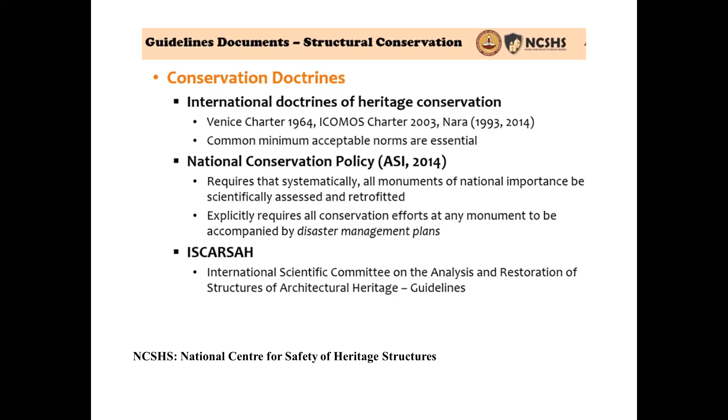Coming back to this, the draft guidelines, as I mentioned, as recently as 2020-21, this ISCARSAH guideline is catered to provide criteria and assistance for the study and intervention of heritage structures. If there are stakeholders who need assistance on how to go about conservation, restoration, retrofitting, or rehabilitation, one can always approach and use these draft guidelines. It is going to help you in going about your work.

Of course, the guidelines are based on the premise that a combination of both scientific and cultural insight has to be there, in addition to the necessary knowledge of all experts involved. That's very important. It goes without saying.

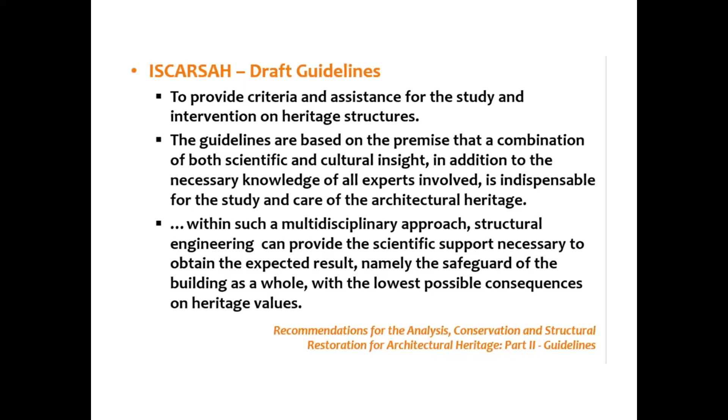Any work involving conservation, restoration, or rehabilitation of heritage buildings is actually multidisciplinary in approach. It involves not only civil engineering and architecture, but also historians, social engineering, and a lot of interaction with stakeholders. So it also involves a lot of historians and so on. It's a very interesting multidisciplinary topic, so to say.

And that is recognized by ISCARSAH and the draft guidelines also. In fact, it encourages one to go about the solution for these problems in a multidisciplinary approach. It is not siloed as the other branches of engineering or the conventional branch of engineering.

ISCARSAH, the draft guideline, also talks about how you are going to define the character of a heritage building. There are certain things which are tangible or quantified, and there are certain things which are not quantifiable. It also gives certain guidelines for that.

For instance, if you look at an old building, you may think that it does not have any character, as a common man or layman. But if you go into these draft guidelines, it tells you what elements you need to look out for. What is the character? How do you identify it? Is it associated with social values or cultural values around it, at the local level, the national level, or sometimes even the international level? It gives certain guidelines.

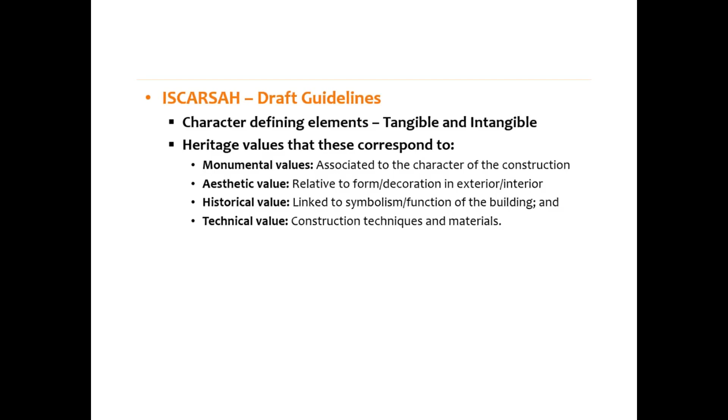In doing so, it talks about the monumental value, aesthetic value, historical value, and lastly the technical value. Technical value is something which civil engineers will be able to easily comprehend and go about. Aesthetic value is where architects and conservation architects are going to be helpful.

Going further, a couple more slides. It talks about the fact that there are some heritage buildings which go beyond the existing codal provisions, because the codal provisions have evolved over the last few decades, or probably just about a century or so. Many heritage buildings, on the other hand, predate all these codal provisions. It talks about the limitations of applying present-day codal provisions to such buildings, and also about how to go about the solution through a conventional approach, based on sound scientific principles.

It also gives guidelines for structural performance and verification and validation. And it strongly emphasizes the fact that whenever we go about restoration or conservation or repair and things like that, the approach has to be based on what is called a minimal intervention program. As far as possible, try to do as little as possible and try to get maximum benefits out of it. That exactly is the challenge in conservation of heritage buildings.

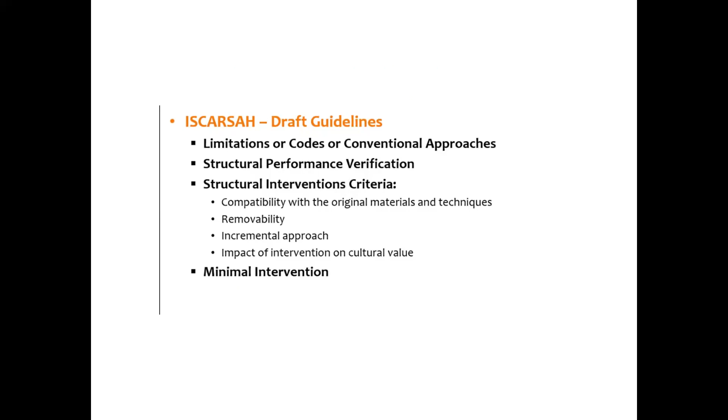Now I'm going to talk about a few definitions which are very important actually. Honestly, I also used to get confused with certain definitions. What exactly is repair? What exactly is retrofitting, strengthening, and so on and so forth. But I have made some bullet points for you to understand this very easily. And then when I talk about the case study, you will be able to relate to these definitions very easily.

When you talk about repair, it refers to post-damage structural and/or architectural intrusion. For example, if there is damage to a heritage building, I may drop the word heritage and just use the word building itself. If there is damage to a building, repair means it is after the damage has occurred. So obviously it's very easy to understand. Repair means that it is going to bring back the damaged portion of the building into functionality, just like it had before its damaged state.

It does not improve or increase the strength or the performance beyond its pre-damaged state. So it's as simple as that. If there is something which is not working, you just get it repaired and start getting it working, just to the pre-damaged state. Usually repair and restoration are cosmetic in nature. That's what generally people have an understanding about. So they are considered cosmetic in nature, just to bring it to the pre-damaged state.

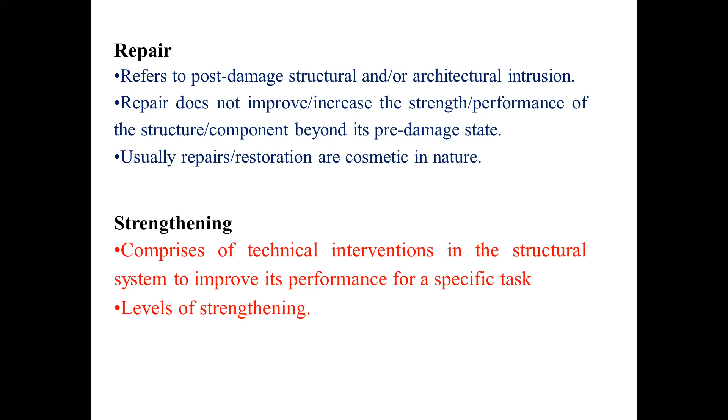Again, I reiterate that whenever you do any of these things, it should be based on the minimal intervention criteria. Just because you want to strengthen an old building does not mean that you can add huge girders and change the character of the building. That's the bottom line. I'm not going to repeat that once again.

Now, this term retrofitting is something which is very commonly used. Strengthening before an anticipated distress is called retrofitting, not after the distress has already occurred. It's very important. Say, for example, there is an unfortunate event of an earthquake and a building has been damaged but has not fallen. You can either repair it or retrofit it. If you repair it, you bring it back to its original condition, which means that in a future earthquake it might get damaged again. On the other hand, if you retrofit it, in a future earthquake it can withstand that event.

Okay, that is called retrofitting. In anticipation of a future event, you are going to do this. So that's called retrofitting. Of course, there are two schools of thought. Some people say that's not the definition of retrofitting and it is rehabilitation and things like that. But I have taken it from the guidelines which I mentioned earlier.

Strengthening after damage has occurred, which can also incorporate additional loads, is called rehabilitation. I'm going to leave it to the participants to delve into these two terminologies. You can make your own understanding of this. I have used certain guidelines, so that's the reason why I gave these two terminologies separately.

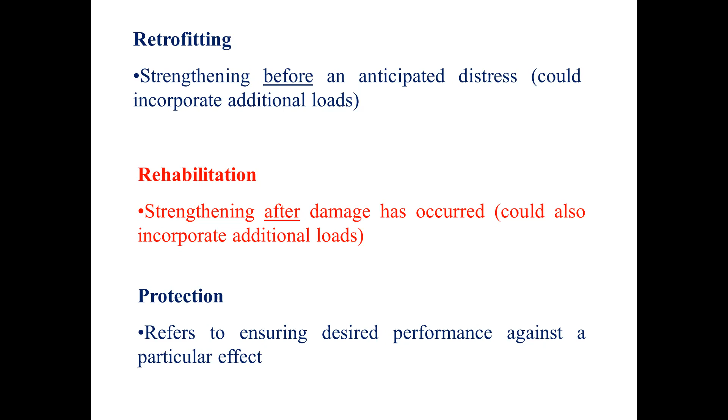So it refers to ensuring a desired performance against a particular effect. It could be a short-term effect or a long-term effect. Again, the bottom line is about minimal intervention. Protection you can always do on a temporary basis. You can protect the building up to a certain time or event, and then go back to the original condition.

The next term which one has to be aware of is called modification. Of course, civil engineers and architects do prefer modification extensively in many situations. It refers to partial or slight change in the structural or the architectural form, especially if you want to change the usage pattern. Let us assume that there is an old heritage library building, and you want to modify it to modern day requirements. It is allowed as per the guidelines.

It could be partial or it could be a slight change. For example, you may want to remove a non-load-bearing system which is not adding to the character of the building. You can do that. So that is called modification. Of course, when you talk about modification, you talk about change in the structural form. This could improve or reduce certain performance requirements. We have to be very careful about that.

In a load-bearing system, it is okay to remove non-load-bearing elements. But if you want to modify the load-bearing element, it may change its performance. So we have to be very careful about that. In fact, in the case study which I'm going to discuss very soon, I'm going to talk about how certain modification was actually necessary and it added to the character of the building.

The next term which we need to be aware of is called rectification. Straight away, it's very easy. If there is a mistake, you need to rectify it. As simple as that. It refers to setting right a mistake that has happened knowingly or unknowingly.

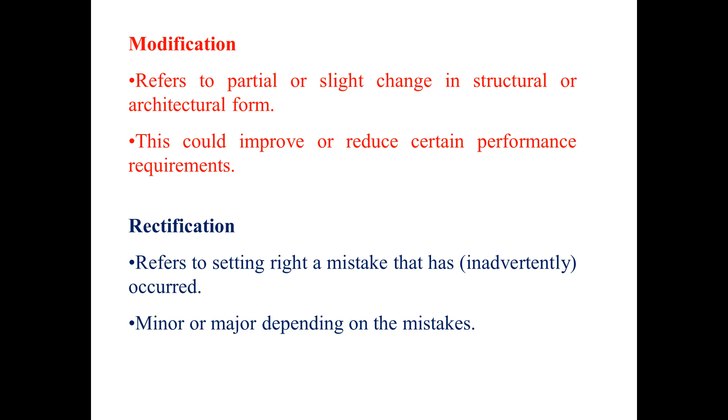Maintenance is something very easy to comprehend straight away. It is the work needed to preserve the intended load carrying capacity. Please note the underlined words: to preserve the intended load carrying capacity. From the point of view of structural engineering, maintenance is required to preserve the intended load carrying capacity.

For instance, if there are steel girders in the heritage building, you need to maintain them regularly to prevent them from getting corroded or deteriorated. You don't want the steel girders to lose their capacity. If there are timber rafters, you need to maintain them. You don't want them to deteriorate and be affected by worms and other things. You have to be very careful about that.

That's very important. In fact, one has to come out with a maintenance protocol once the entire process is done. Even new buildings need maintenance. Modern day buildings also need maintenance, so there is nothing wrong about it. Any engineering system does need maintenance, and so is the case with heritage buildings as well.

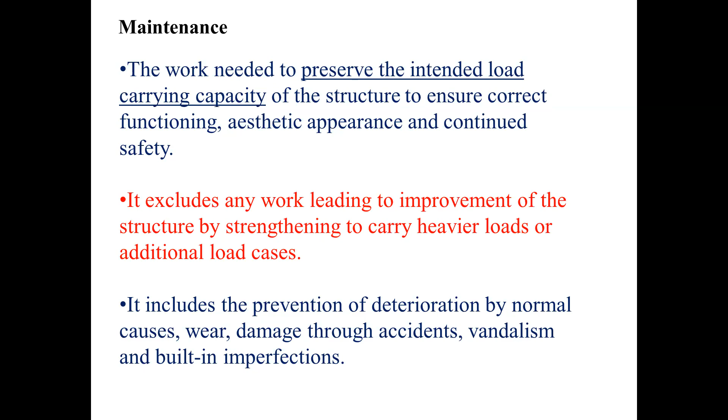Of course, it excludes any work leading to improvement of the structure by strengthening, or to carry heavier loads or additional load cases. It includes the prevention of deterioration by normal causes, or wear and tear and so on. You can't have a protocol for maintenance when vandalism is going to come in, things like that. So one has to live with it.

Maintenance, of course, deserves extreme attention. I have given an example. In railways, there are what are called permanent way inspectors. They are the ones who maintain the tracks, a crucial lifeline of railways. Their only job is to ensure that the railway tracks are in functionality without compromising on safety. Very important. It needs to be performed in a systematic manner.

As I mentioned earlier, we need to come out with a protocol of maintenance. You need to have a checklist and do it in a very systematic manner. You cannot bypass any of the parameters given in the protocol. All structures should be designed and constructed with consideration of both capital expenditure and predictable maintenance cost.

One of the common mistakes many of us make is to think that once you comprehensively repair and rehabilitate a building, you don't need to worry about it for the next 50 or 100 years. It's not like that. It has both capital expenditure and a maintenance cost, so it has to be considered when you're talking about financial implications.

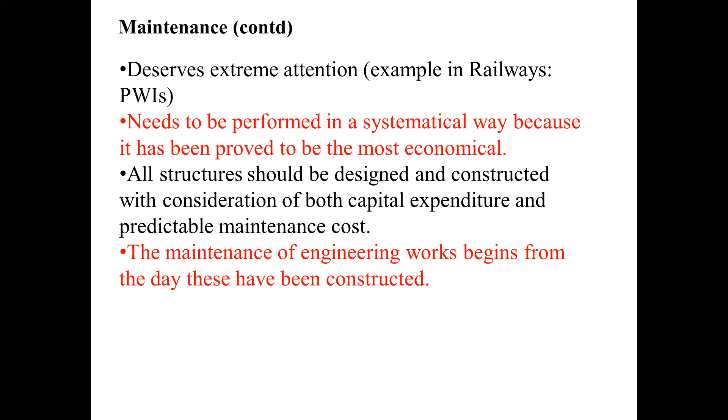Lastly, the maintenance of engineering works begins from the day they have been constructed, right from the day. It's not that you can start maintenance after two or three decades. It starts from day zero. Two more terminologies before I close the first part of my lecture: conservation and restoration.

It describes the process through which the material, historical and design integrity of any built heritage are prolonged through carefully planned intervention. It's very easy to understand. When you conserve something, you are going to extend its life without compromising on its performance. You are going to extend its life carefully.

For instance, I can give a very amusing example. Modern day cricketers, if they want to prolong their career, may drop out of one of the formats. Probably they may drop out of test matches and prolong their career in T20s and ODIs. To prolong their career further, they may drop out of two formats and continue in only one. That is called conservation.

You conserve the performance through a carefully planned intervention technique, in engineering I'm talking. It includes examination, documentation, treatment, and preventive care. By the way, all these terminologies, very interestingly, are used in the medical field also. Whatever happens to a building is valid for a human being too. You retrofit, repair, operate, modify, conserve, and prolong the lifespan of a human being. There are a lot of remarkable coincidences between the medical field and civil engineering.

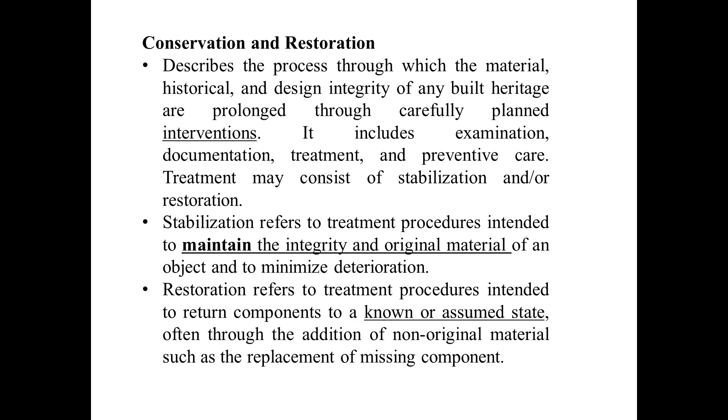A repeat of this: rehabilitation operations aim at restoring the structure to its original service level. In some cases, this consists of giving the structure the service level which was intended but could not be attained because of inherent deficiencies in the original design.

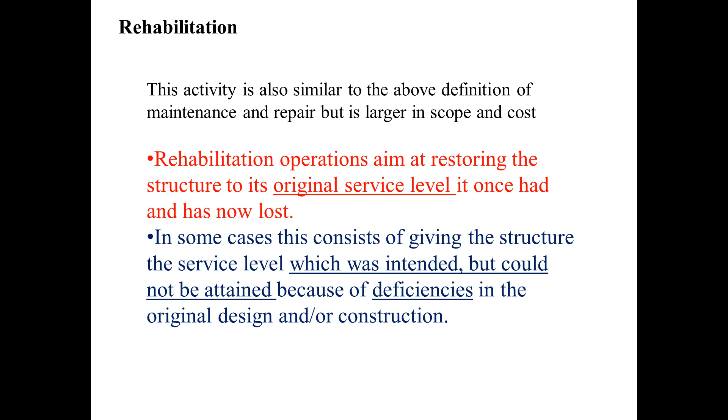When to rehabilitate? Having done with these terminologies, let us move to a very important question which I posed in the beginning of my lecture. First of all, when do you define a building as a heritage building? There are guidelines for that. When to rehabilitate it, at what point in time, or do you want the building to continue in the existing condition? These are all some of the questions.

Very interestingly, in our Archaeological Survey of India, quite a few monuments, we do not go about rehabilitating them. We continue conserving them unless you come out with some known signs of distress. For example, many of the heritage monuments in Karnataka, you just continue in the same state. You conserve it, that's it. You don't rehabilitate it.

If the levels of deterioration show a positive sign of change, you need to rehabilitate. And if you know that aging is leading to deterioration, visible signs of deterioration or documented evidence, then you need to go for rehabilitation.

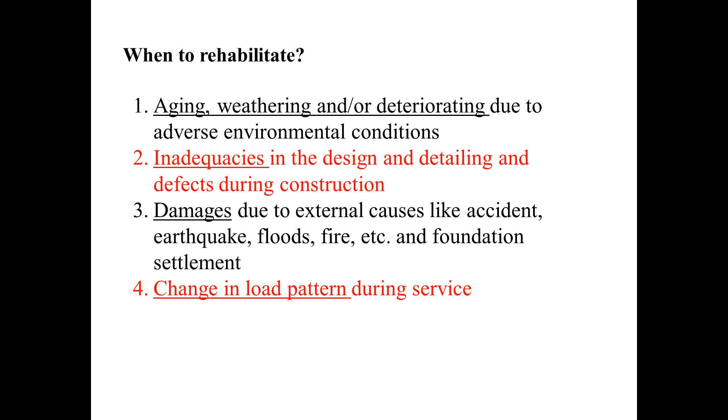It also depends on the change in the load. Many of the heritage buildings are in functional form, so it's not that they are kept empty.

Quick terminologies: replacement, as the name itself says, you can replace certain components of a building. And if a certain component of a building is broken, or it has come off, you are going to reconstruct.

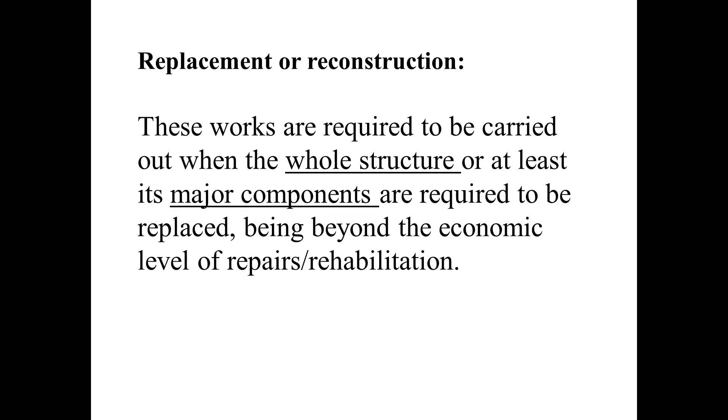Probably I'll come to the main part of my lecture. The summary of whatever I have been discussing can be related with one important thing: how are you going to relate the cause and effect? What led to the effect which you actually notice now?

If there is a building which has got a crack, what was the reason why that crack happened? If there is a building which is profusely leaking, what is the reason why it has started profusely leaking? So this is something which is the most difficult thing, in my opinion.

You need to relate the cause and effect. As a civil engineer, I think that's the most important thing. What is the cause of the damage? What is the cause of the deterioration? What is the cause of the defect? What could be the cause of some deficiency in that building or its components? What is the reason why that mistake happened? Were there any overloads or events that were overlooked, or any accidents it met with earlier? You need to relate the cause and effect in measurable and describable form.

If you are not able to do these two things, you will not be able to go about with the repair, rehabilitation, or conservation.

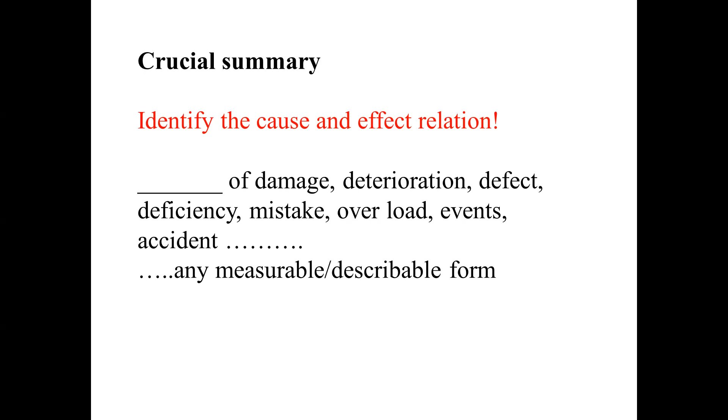Lastly, there are a lot of questions which bother most of the stakeholders, including civil engineers. In the case studies I was involved with, many of these are some of the questions which bother us.

How long have the signs of damage been noticed? You see a crack—was it a recent one, or an ancient one, or is it increasing? Is it changing? So how do you know the load path for which the building was designed, or what was the intended load path? What was the intended structural form?

Could some defects have been overlooked or unknown? Will there be any further damage when you do something?

What happened in a similar structure elsewhere is also very important. Very often we tend to get some kind of safety in knowing what others have done in a similar situation elsewhere. Very, very important—sharing of knowledge is important, and sharing of mistakes we have made is also very important. You don't want to repeat the mistakes; you want to emulate the good practices.

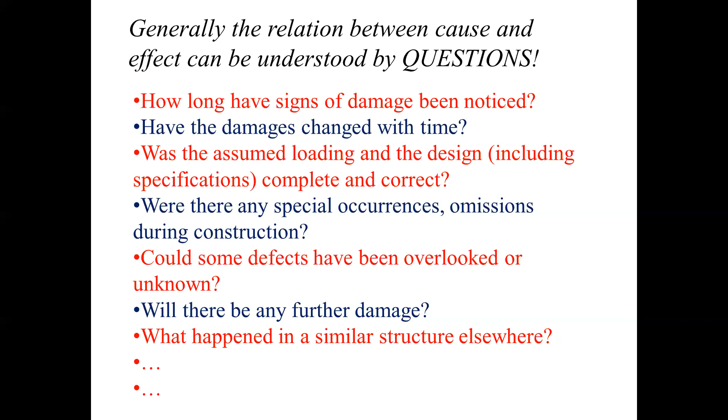So the bottom line is, how do we repair, restore, rehabilitate, or strengthen, or whatever. There are several factors involved.

I have sort of shortlisted them. It depends on the importance, and obviously it depends on the cost. It depends on how reliable your maintenance, repair, or conservation plan is, how robust it is. It should be feasible—if the cost permits, is it possible to do it? Do you have the wherewithal, the technology, and the skill set to do it?

What are the risks associated? Is the scheme of conservation or rehabilitation robust enough? Is it amenable for future modifications? For example, if you want to introduce something and it's not amenable for future modification, it may not be a good idea at all.

What is the past performance of similar schemes? What is the duration required for carrying out all these things? Of course, there are social aspects—you don't want to change the social aspects. A heritage building is quite dynamic in nature, despite the fact that it looks aged and lifeless. But actually it's quite dynamic from the point of view of social engineering.

What is the recurrence data? The damage caused by non-structural elements—all of these play a very important role.

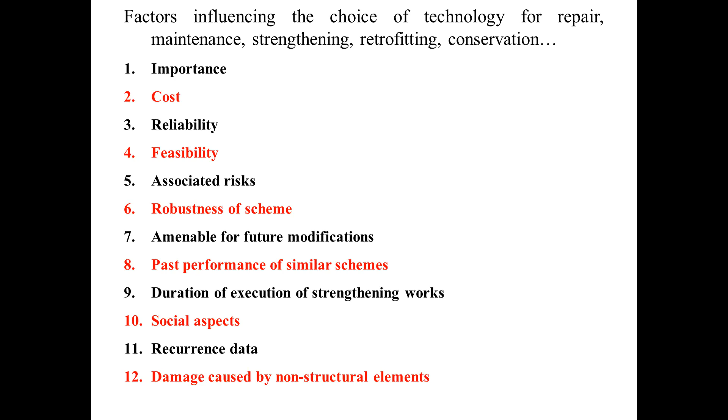I have answered all this question earlier itself. Are there any guidelines? Yes, there are, but the guidelines are generic. One has to come out with innovative, case-specific guidelines through comprehensive study of the heritage.

Decision making is often quite difficult because, after all, no two heritage buildings could be identical. In fact, no two modern buildings are identical either—that's a challenge in civil engineering. So is the case with heritage buildings also.

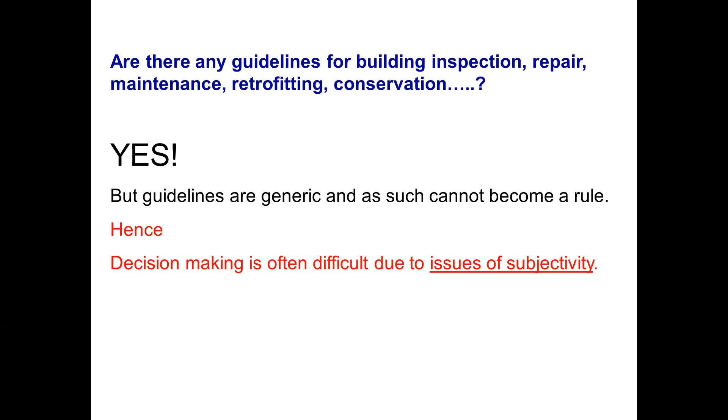I will skip this, and also skip this. I will now come to the second part of my lecture, that is the case study.

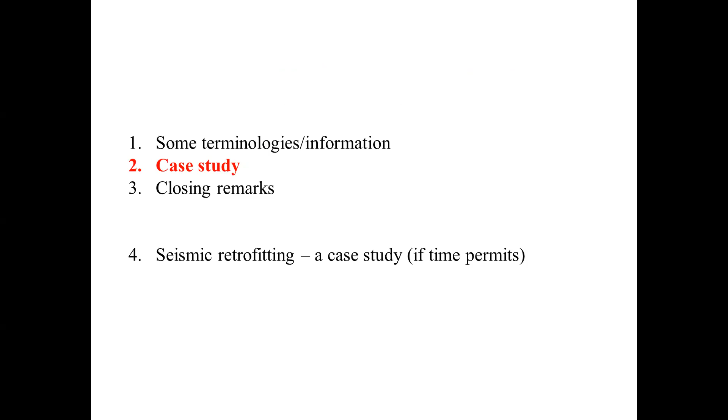I was fortunate enough to be involved in the rehabilitation and restoration of this particular building. This had heritage value for several reasons. By the way, this is a building which belongs to the University of Mysore. And you know that the University of Mysore was very proud because our former president, Dr. Sarvepalli Radhakrishnan, resided there as a professor, using it as his residence for a period of 5 years during his academic tenure.

As a consequence of which it had got heritage value. It also had heritage value because of the character of this building. These buildings, along with the university main building and surrounding buildings—the hostels, the administrative building, the library and things like that—they were all built with a certain character. It had given an appeal to the entire campus, so obviously it also became a heritage building.

So the University of Mysore was scouting for people who could participate and help bring about restoring this building to its original condition, or as near to its original condition as possible. When we first went there, this was the condition of the building.

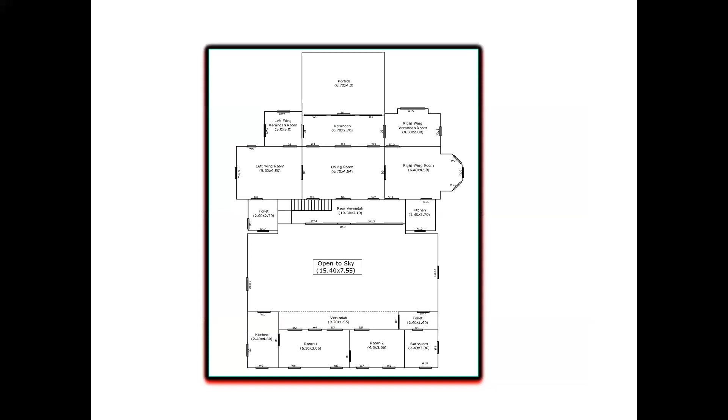Now we start with the structural assessment protocol. You just cannot say that I observed a crack here and then there's some distress here—there has to be a systematic way in which you document this. So, the structural assessment protocol: initially you need to do some exploratory studies, or you can also call it a reconnaissance study. The more visits you make to the building, the more you understand about it. It's very important to engage with the building quite often in the preliminary stages.

Just keep visiting the building and keep observing it. You will be able to understand the structural form easily. In my experience, the first time you visit a building everything might seem very complicated, but the more times you visit it, the clearer it becomes. The analogy is quite remarkable - even for a doctor to understand a patient, more visits are important. Only then can the doctor make a guess about the situation.

So exploratory studies are very important. During this time you can also get the foundation profiling done, which is not visible otherwise. You need to get the foundation profiling and soil investigation done - it's a mandatory requirement.

You need to carefully inspect it. You need to grade the components of the structure based on visual parameters. I'll tell you how to do that.

You may want to do certain technical inspection tests, like non-destructive testing, partial load testing, or comprehensive load testing. There are so many methods by which you can come out with an assessment of the structural parameters.

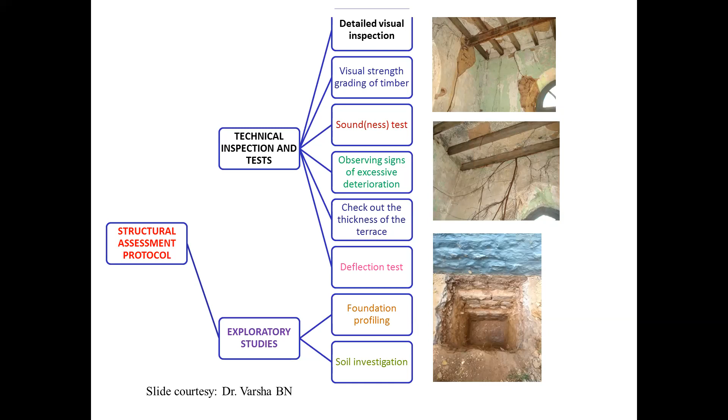Now, if it were a modern day building - say a modern concrete building - it is very easy to evaluate the in-situ parameters. For example, you have cast a concrete slab and want to know whether the concrete is good quality or not. There are several ways by which you can do it.

You can do an NDT test, or take out a sample - you can extract the core of the concrete and test it in the laboratory. Or you can do a profometer test. You can also conduct corrosion testing on the reinforcement, and so on and so forth.

But unfortunately, in heritage buildings, most of them were constructed predating the modern codal provisions - we never had all these things during those times. So there are some guidelines nevertheless, but probably we are not aware of that. We need to rely on this very crucial parameter called visual strength grading. It appears subjective, but trust me, it is not.

For instance, if you want to do a visual strength grading of timber members, these are the things you need to look out for. Is there horizontal splitting in the timber member? Are there any flexural cracks? Are there flexure-shear cracks, or shear-compression cracks? Is there any delamination of the timber elements? Is there any loss of cross-section area?

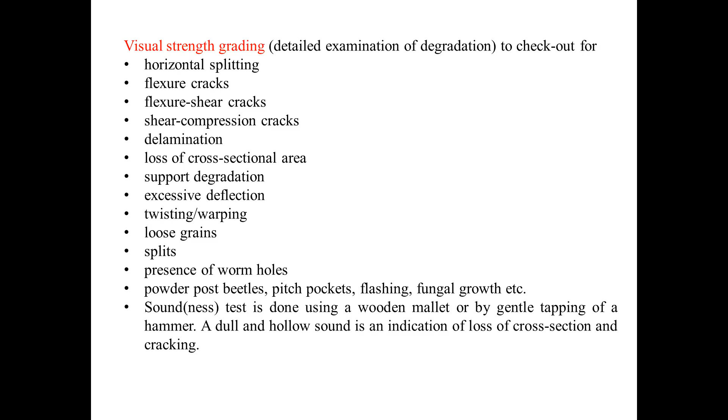The moment you do this visual strength grading, you need to document it. You need to convert that into drawings - very, very important. Is there a settlement? There are a lot of surprises which one may come across when you start doing the documentation and convert that into drawings.

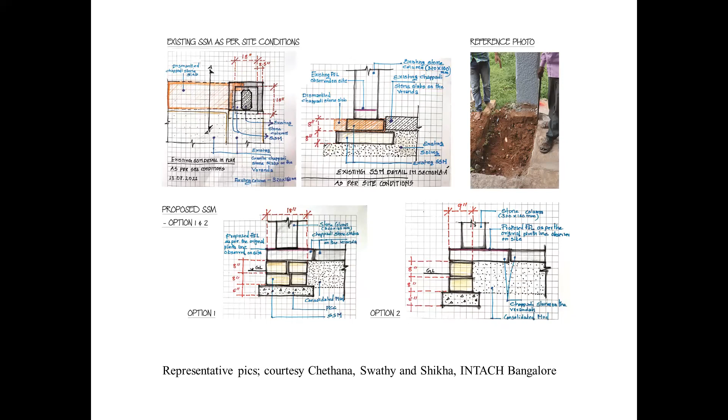Okay, you'll really understand in the engineer's language. Now let us go virtually into these components of this building.

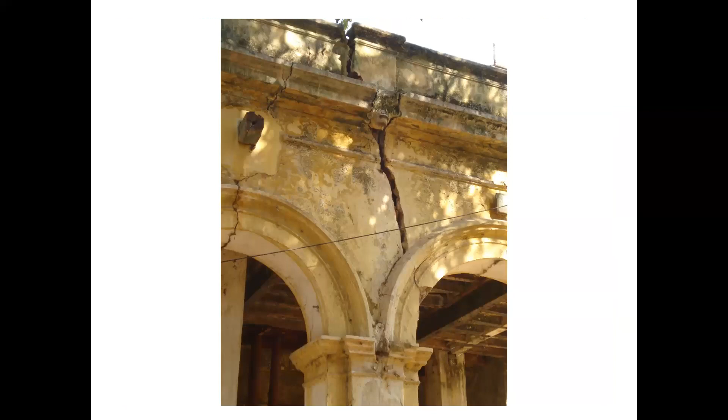There's a severe separation of the component, the roof of the portico, and it was supported on the front edge of the building by arches, three arches. There's severe cracking, shear cracking in the arches. This is something which you notice.

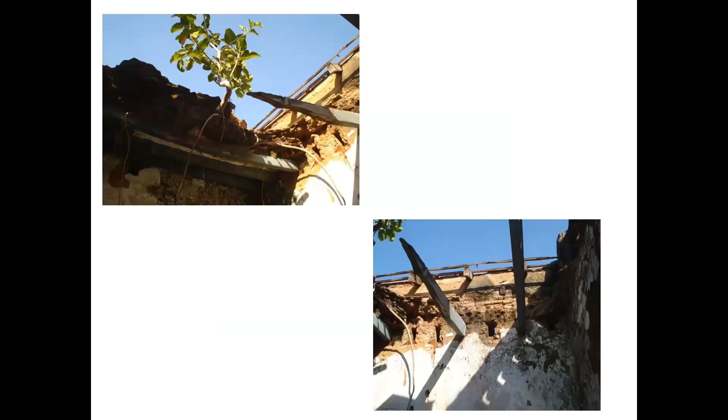And I come to the front, the portion where you saw severe damage in the front of the upper floor of the room. It had got badly distressed because the roof had come down. So the Madras terrace roof is a timber-supported roof.

There are timber rafters placed at close intervals, approximately 600 mm center to center, 600 to 700 center to center, on which there are thick layers of masonry constructed, and it acts like a roofing element. The timber rafters had gone, and as a consequence the Madras terrace masonry part had come down. The entire roof was exposed to sky.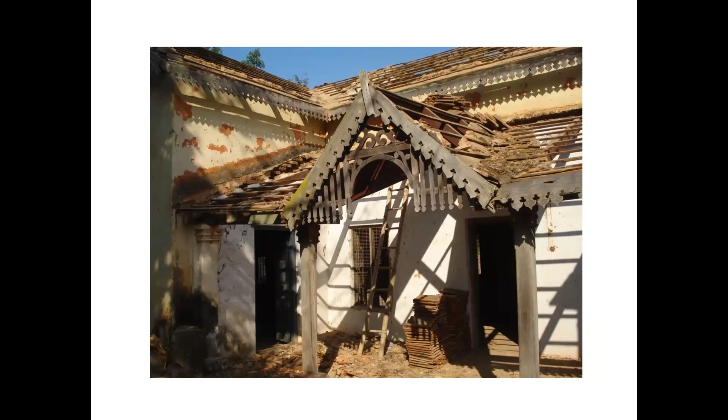And you will also notice that there is a growth of this vegetation. It had added to the distress. Very ideal for the trees to grow. It has got a good amount of nutrients for itself to grow. And this is the amount of distress you see in the upper portion of the portico. So in front of this, the portico also had partially damaged.

There's one huge 1 meter diameter depression. In fact, carefully when we went there and just poked it with a crowbar, the entire thing came down. 1 meter diameter of the wall came down. So you have to be very careful about that as well. So this is a close-up view of the, I cannot call it a crack. It is already loss of the elements itself.

Now here is something which I would like you to ponder upon. If you recall the plan form, there's an internal staircase. And this was an external staircase constructed in RCC. Obviously, you don't need to have profound knowledge. This was added at a late stage for the servants to come and access the upper floor of the building.

So they had removed a window opening and converted that into a door opening, and they had added this staircase. Obviously, the conservation architect would be concerned about this, and even a layman would be concerned about the character of this building. We took a call to remove the staircase and bring it back to the original functional form. Now I have not gone into the inner details. I'll come to that also very quickly.

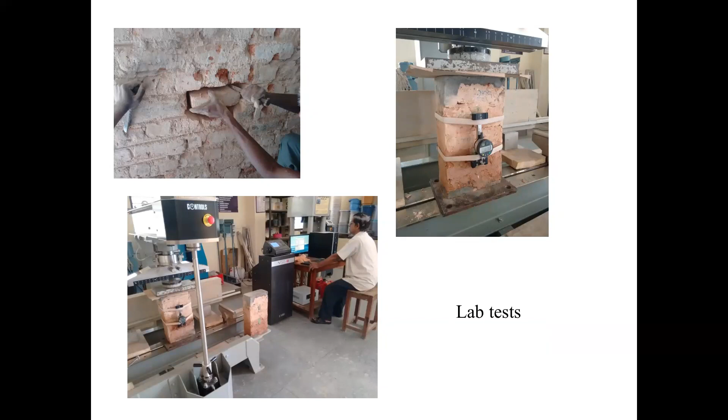You see my former colleague, late Parsati, who used to help us in all these things. Obviously, that was a heritage masonry building. We need to assess its masonry capabilities. We took out the brick samples, the mortar samples, tested the prisms in the laboratory, and we were able to assess its prism strength to the maximum extent possible.

And sometimes, but this is just a representative picture, not with respect to that particular building, for Madras terrace roofing or jack arch roofing or any roofing system, if the visual strength grading does not give you good confidence to judge the condition, you may want to resort to a load test. A load test is very simple and straightforward. It may be complicated to execute, but in principle, it's very simple.

You subject the roofing elements or any of the structural components to the prescribed load. For example, if it is a roofing element used in a residential building, you know that it had to be designed for 2 kilonewton per meter square in the present codal provisions. You load it to its factored load, 1.5 is the factored load, and go well beyond it, and get a load versus deflection curve. Knowing that load versus deflection, you will be able to assess its stiffness and its strength.

You will also be able to assess its residual strength beyond the working capacity, or the unfactored load. This is very important. You may want to go to the load test protocol in the event that you are not able to make any judgment from NDT, visual inspection and other distress parameters. This is a last resort. You don't want to do this as a first step.

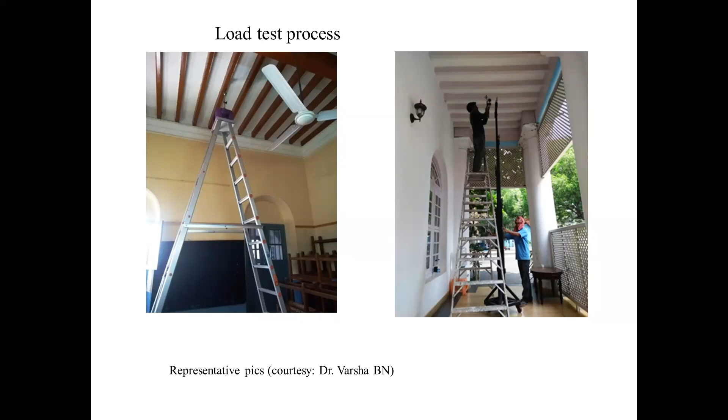Of course, there are NDT. I think I should have shown this slide earlier and later shown the load test. Just like you do NDT for any of the modern day materials and components, you also have this special rebound hammer for masonry, and different types of transmitters and receivers for pulse velocity measurements.

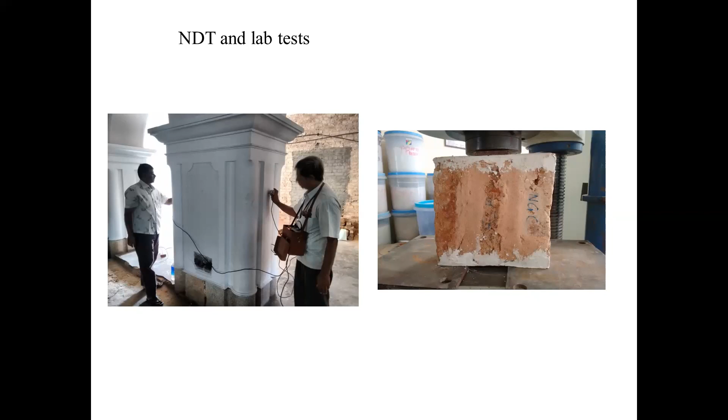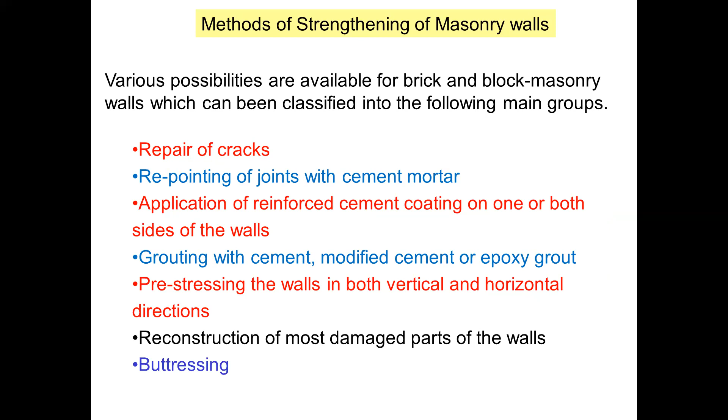Now, having done this and documented the entire thing, how do we go about the repairing techniques? You come out with a scheme and indicate your scheme both through drawings and through photographic processes. Sometimes the drawings may not be comprehensible by some of the stakeholders involved in the repair process, so you may want to indicate it on the picture itself. These days you have got the tools to do that.

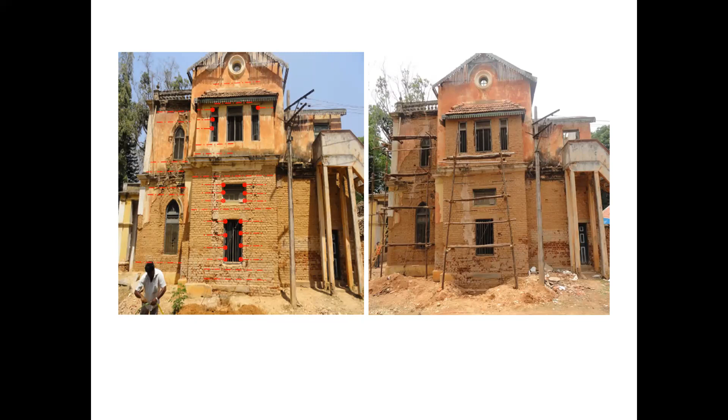I may not be able to go into the complete technical details of what I'm going to call stitching of a crack. A crack can be arrested from further growth and then closed back by a technique called stitching, using reinforcements. You can do it in a very systematic manner, comprehensively, through a high-end engineered product. There are a lot of engineered products available for stitching of masonry. One such product was used in this building also. They were provided by M/s Helifix. They are well-known experts in stitching of masonry.

In a simple manner, if there is a vertical crack, you need to stitch it horizontally. If there is a horizontal crack, you need to stitch it vertically. And if there are radial cracks in an arch, you may want to stitch it diagonally. I'm trying to put it in very simple layman terms, but there are guidelines available for that, and you also need to do some empirical designs. Each vendor of this technique comes out with their specification. They would have done a lot of laboratory tests, and you can also do that if you have the wherewithal in your own laboratory. So you resort to these techniques.

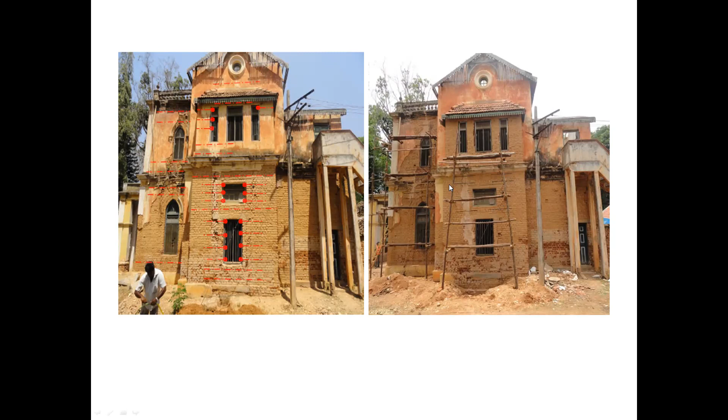Here is something on the left-hand side of my screen. You see the locations of the thin reinforcement to be introduced in the bed joints of the masonry, which we had indicated, and the team had executed that. Can you see the thin gray lines? They are the thin reinforcement surrounded by compatible grout, compatible with the surrounding lime surki mortar masonry. You can also notice that it's so thin that it may not change the character of the building, and once you plaster it, it gets covered. So this is the technique which is suggested.

The corner separation is something which is quite complicated to handle. You can use a ferrule and drill a thin hole, then insert the reinforcement and tighten it, and you can close back the cracks. If you are not able to do this, you may want to resort to careful reconstruction, removal of that component of the building and reconstructing it.

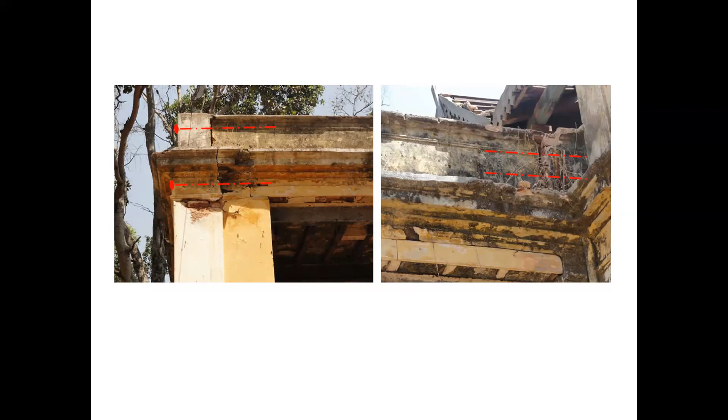Here is another example. Multiple horizontal stitching was suggested and done. Then there's a radial crack in the arch. A diagonal stitch tie was introduced that you will not be able to see in this right-hand picture; I'll show a close-up view of that at a later stage. So this was done systematically. Obviously, when you notice a crack and want to do all this stitching, you have to remove the plaster. That's something you have to be careful of.

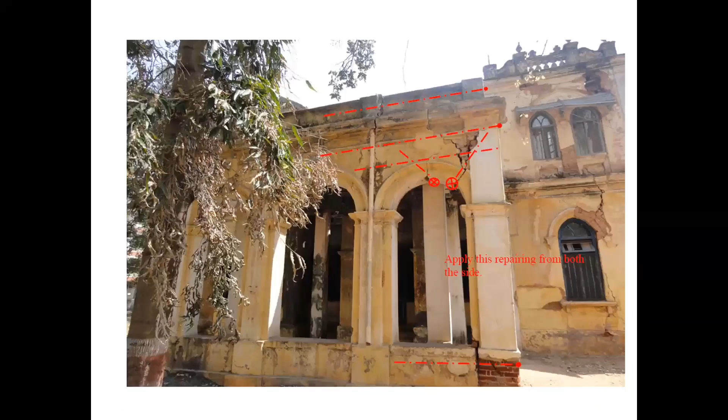Similarly, for each and every portion of the building, you need to come out with a comprehensive repair retrofitting scheme through some indicators. Different vendors have got different indicators. You can also come out with descriptors and indicators, legends. You can do this.

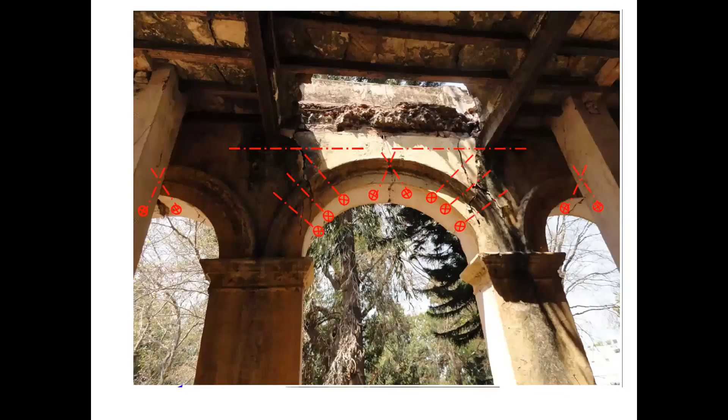This is the portion where I was mentioning that in the portico, a huge portion of the wall roofing had collapsed. It was actually quite precarious. So this is the portico, and you recall that there's a severe shear crack in one of the arches. So we had to do multiple strengthening here.

And so this is where you can't do anything. You may have to rebuild it. When you want to rebuild it, you have to be very careful. You need to be very innovative. Are you going to remove this wall and rebuild it, or carefully rebuild only the portion of the wall which is not present over there? That is where safety protocols are very important. I think the presence of all these stakeholders over there when these things are done is very, very important.

Unlike the new construction, where you come out with the instruction and the trained masons and other people can construct the building, and the engineer's presence over there could be quite notional or nominal. But in case of repair, rehabilitation and restoration, sometimes safety is also in question. You have to be very careful. You should not end up with a bad event in the process.

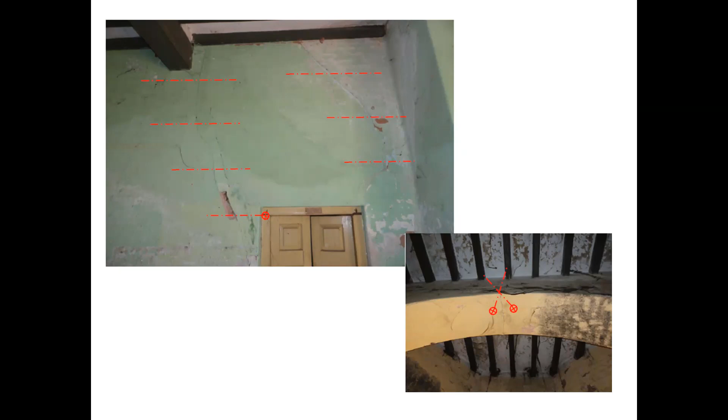The inside of the building, which I had not shown earlier, you could see a lot of cracks in many of the components. In fact, this building was so badly damaged and cracked that quite a few of the earlier bidders had told that this building is not worth retaining. They had suggested that this building had to be demolished and a new building constructed for some other purpose. But University of Mysore, thanks to the then Vice Chancellor, was very much keen on restoring this particular building. That was a challenge to our team also in many ways.

So this is another portion, badly damaged again because the roof had collapsed. Because the roof had collapsed, a lot of exposure of the internal wall to the rain and the vegetation had added to the distress in the walls. So multiple layers of stitching had to be done. And you can see an elliptical arch over there, 3-centered arch, shallow arch, and this is the portion which needed to be rebuilt.

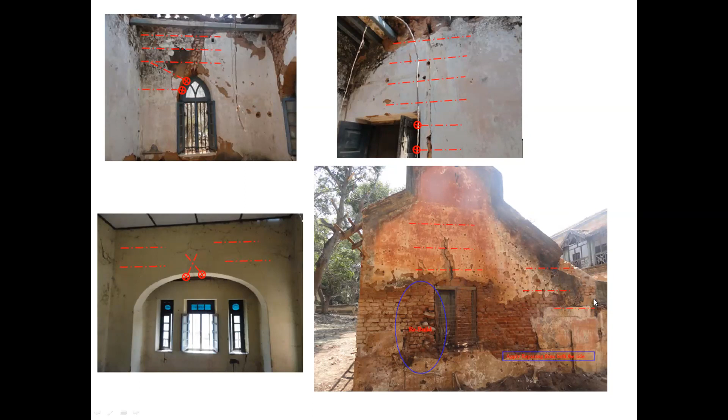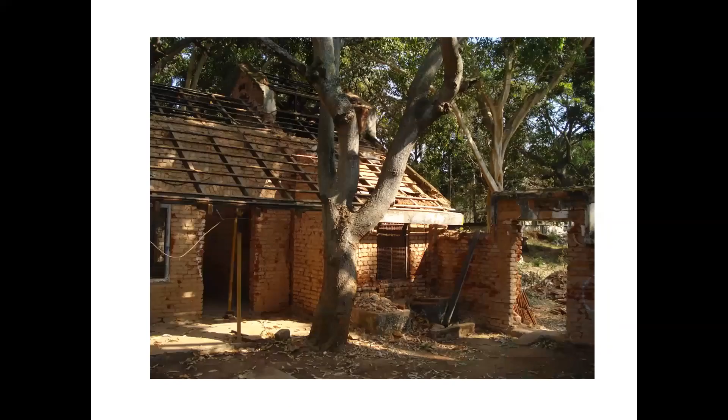By the way, this is a service quarters behind the building. And this was the state of the building when we removed some of the roofing elements. It was completely in a bad shape. So the proximity of certain trees which grow gigantically also causes a lot of problems. You have to take a call on that also.

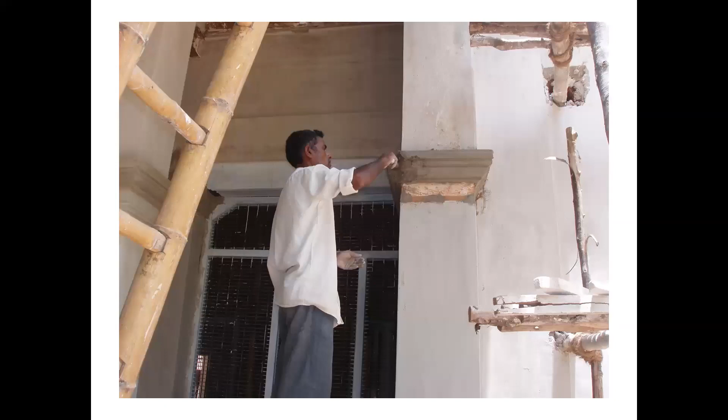So now I come quickly to the repair and rehabilitation and retrofitting. Obviously, the ornamental work has to follow the structural strengthening. Structural strengthening is the first thing, and the protocol is very simple. If there is any damage or distress in the foundation, you address it first. Then you talk about the vertical load bearing elements, then the floors, then the roofing elements, and then the other structural components like staircases. So this is the protocol. Foundation first, and the last thing is the ornamental features.

After the structural strengthening, you need to quickly reassess your entire process before the finishing team comes and starts plastering. So you need to come out with a checklist again, whether your scheme has been executed properly or not. You may want to do a quick test again to check whether the strengthening is done properly or not. There are protocols for that also.

The challenge in this particular building was the fact that we had to use lime surkhi again, because the original building was constructed in lime surkhi mortar. During the earlier days, they did not have these motorized grinders. They used to have a bullock driven stone grinder. So we used an electrically operated stone grinder. We had to do it in large quantities, and we had to do it quickly before the onset of rains. The entire process took slightly less than 9 months.

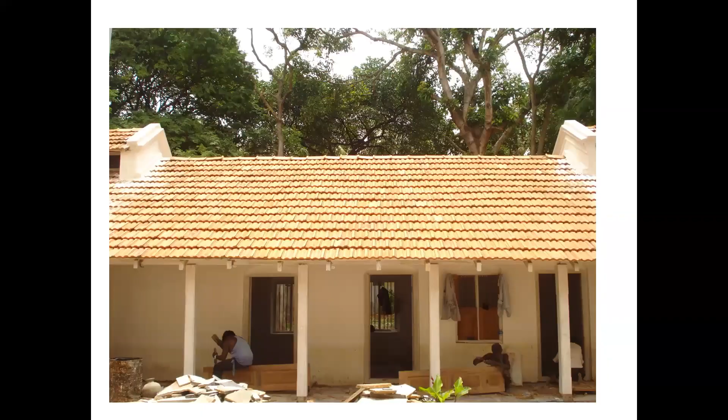So carpenters and then finishing. One after the other, the components of the buildings are completed. Structural strengthening followed by architectural restoration.

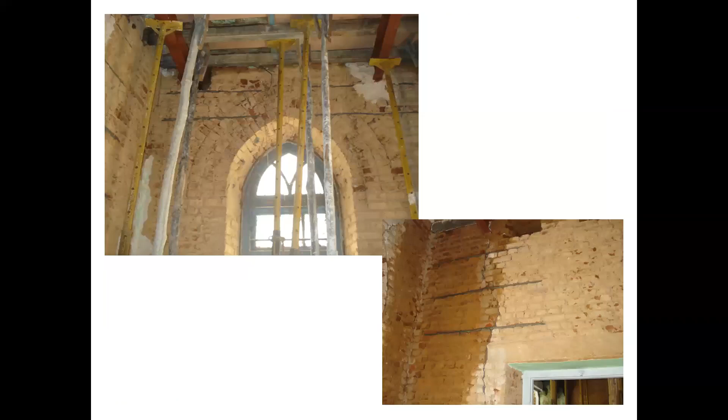And you see the strengthening inside. Okay, so the multi-centered arch.

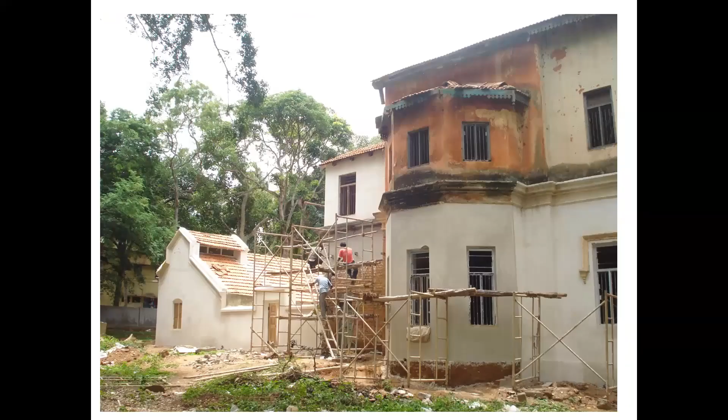Okay, then you start plastering it. You see the crack on the left side. That was pushed back and then stitched using the reinforcement embedded into the masonry wall, and then it was plastered. You see the ground floor almost on the verge of being completed.

You see this, that is the condition of the building before and then after. So you still see the carpenters working. The condition of the roof.

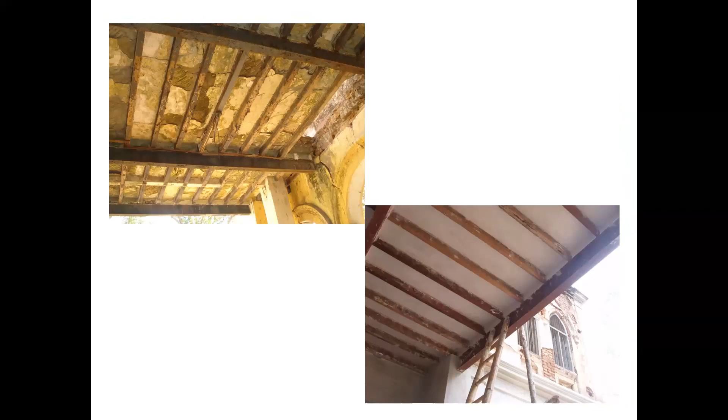Fortunately, though there was a delamination of the soffit, we had to remove the entire soffit plaster and then redo this. Fortunately, the masonry part of that was not damaged.

So some portion had to be reconstructed. You see the fallen portion within the rafter. In fact, some of the rafters also had to be replaced. So we had to do that. It is possible to replace the rafters also.

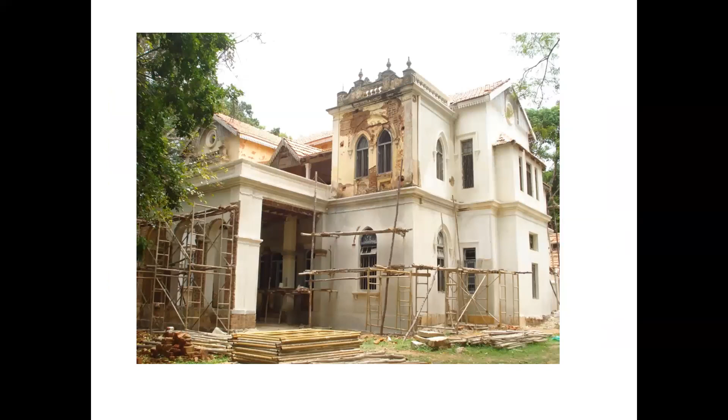The major distress was addressed in the end. You can carefully see this. If you carefully observe this, you can see the reconstruction done.

You may have to be careful about compatibility of the new construction with the old construction. You may have to take care of the toothing between the old and new masonry, and then you may want to introduce some dowel joints and things like that. All this was done. Because of paucity of time, I may have to skip those details. You are always welcome to get in touch with me for those details. This is the condition of the building before, and this is the condition of the building eventually after the entire retrofitting was done.

So this is the case study. I have come to the end of the case study.

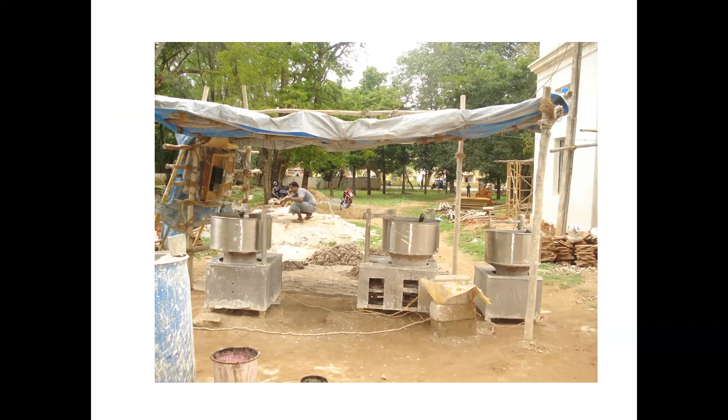During the time of construction, all these things were an extreme understanding for me. Honestly, I was humbled by the amount of knowledge which he possessed. I have documented quite a few of whatever he told. My interest in lime actually started after this building, and today there are a couple of my students working on lime.

So it's really interesting, sir. One more question from the participant: can you briefly share some info on retrofitting of SSM foundation for load-bearing structures?

I can share that PowerPoint presentation with you. Dr. C.K. Shiva, you can share with them. Yes, sir.

So for SSM foundation, typically one of the easiest ways of strengthening an SSM foundation that is found inadequate for modern day conditions is to add layered courses and abutments below the ground level. There are also underpinning and shoring techniques, and extremely complicated methods where you can carefully remove the SSM foundation and insert raft beams. To that level, we have got the engineering today.

I'm going to share some basic SSM strengthening techniques as soon as my lecture is over, so you can share it with the participants. Thank you, sir. Sir, one last question.

Rehabilitation and repairs of a particular building suggested from different sources are expected to be different. Is there any final say on the decision-making process? Oh, it's a very good question. I knew this question was coming.

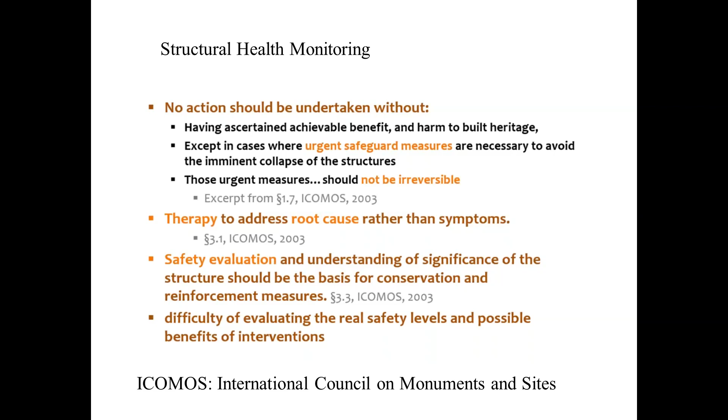For example, in one of the case studies, which I'm going to quickly come to, we had to find out the in situ shear strength of masonry. We had embedded a load cell into the wall itself to find out the response of the wall when it was subjected to shear load, and we embedded a strain gauge to get the shear stress versus shear strain. It is possible.

So structural health monitoring plays a very important role. There are a lot of parameters there of what should be the approach - preventive strategy and quantitative recording. As I mentioned, we have started moving from qualitative parameters to quantitative parameters. More and more advanced countries are talking about quantitative descriptors. They don't want to rely on qualitative parameters. So damage detection has also become a very complicated thing.

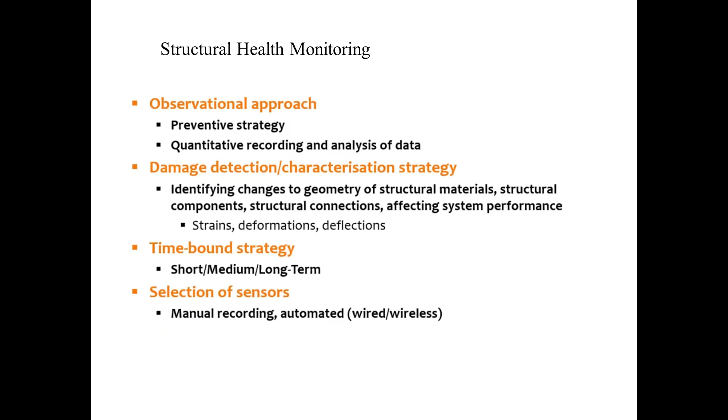You also resort to modern day softwares, simulation softwares and things like that. Of course, we are aware of finite element and things like that. So you've got other modern day softwares also, and a lot of sensors - not only embedded sensors, non-contact type of sensors also. Very thin, very smart sensors. So it can detect a lot of parameters, and they are all embedded.

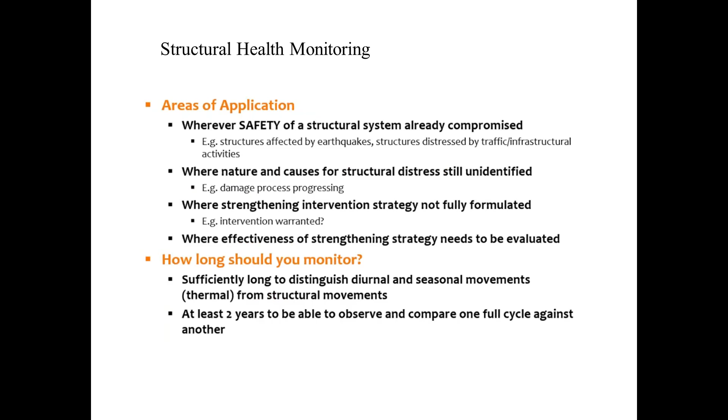By the way, structural health monitoring is not only for the superstructure, it's also for the substructure - the soil and the foundation, and also for the deep part below the ground level, below the water table level. Inclination you can measure, tilting you can measure, also through modern equipment like tilt meter, deflection meter.

And you can get the data real time. The data comes through internet, so it is put on the cloud. One can access the data at any point in the world. You just have to download the data and then process it.

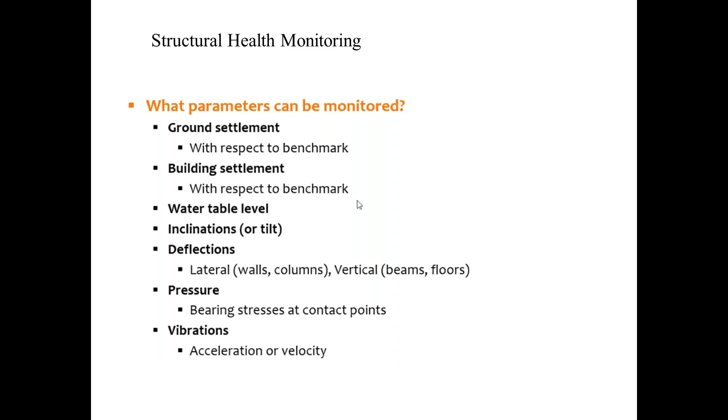We did not use any of the modern day elements, but for the stitching of the cracks. We could have done without that also through traditional methods of stitching. Maybe some other time, some other opportunity, I'll talk about that also.

Stakeholders responsible for this strive to retain the form, the feature, and the character of the building. It's very important that a civil engineer cannot bulldoze his decision onto the conservation architect, neither the other way around. We should also respect the historian's perspective, and it should not be done at the primary cost of finance, which is very, very important.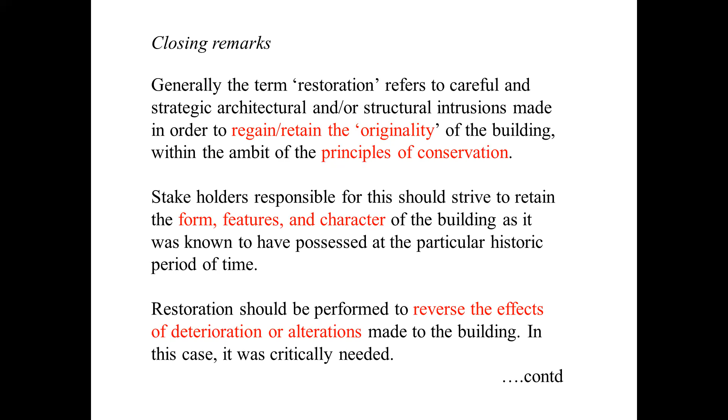Restoration should be performed to reverse the effects of deterioration. That's also important in my opinion. It's not that you bring it back to its original glory, but you also ensure that it starts performing better and better in the future.

The difficulty lies in retaining the authenticity as accurately as possible, because you are not equipped with any codal provisions in the first place, and you have to make a judgment of several parameters, whether you measure it or visually see it. You need to make an engineering judgment. That's a difficult part.

Quite often restoration is a learning process. It's not the end in itself, it's just a means. So it's a journey.

As I mentioned earlier, preparation of lime surkhi in this building was quite a challenge. Some experienced masons were helping us out.

The duration of the project was 10 months, but it was completed much earlier than this. It was formally, you can use the word, re-inaugurated on 8 December 2012.

Lastly, heritage conservation is an opportunity for engineers, in my opinion, as I've learned a lot more than I've given.

Certainly, I have learned to understand materials, techniques, and technologies in a more comprehensive manner. I've learned quite a lot about the culture, the engineering culture during those days.